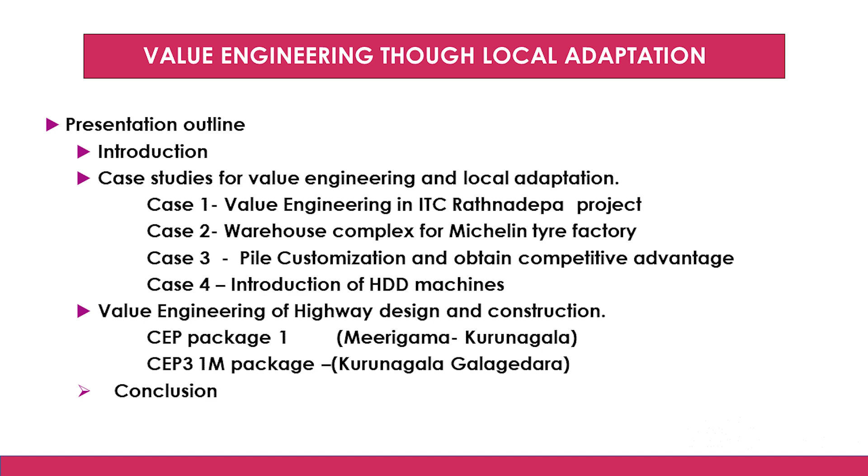The process of cost saving and efficient performance while improving functionality and quality is considered as value engineering of a construction project. Value engineering is largely a discussion point in the Sri Lankan context as well as globally. Because now the resources are depleting very fast, we need to preserve the resources for the future generation. So therefore, value engineering as well as green concepts come into consideration.

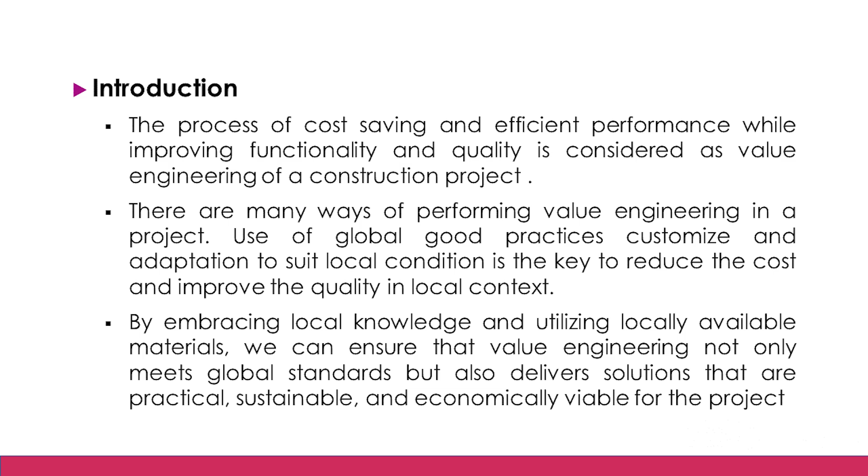There are many ways of performing value engineering in a project. Use of global good practices, customizing and adaptation to suit local conditions is the key to reduce the cost and improve the quality in the local context. In the case studies, I would like to discuss more in this aspect. By embracing local knowledge and utilizing locally available materials, we can ensure that value engineering not only meets the global standard, but also delivers solutions that are practical, sustainable, and economically viable for the project. With that note, I would like to go to the case studies.

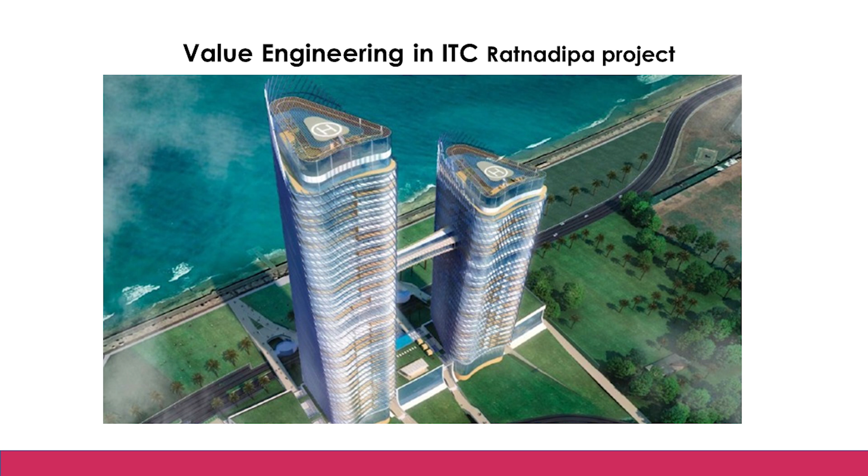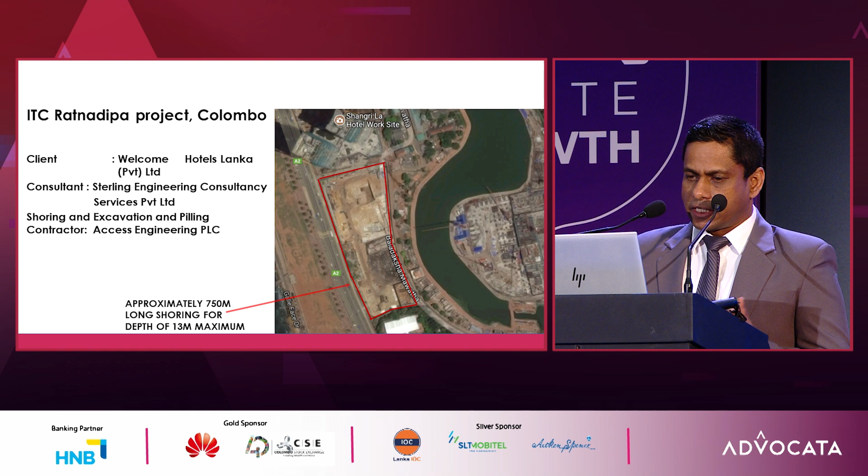The first case study I would like to discuss is the ITC Ratnadipa project. I would like to give some overview of this project. The client is Welcome Hotels Lanka Private Limited and the consultant is Sterling Engineering Consultancy Services Private Limited in India. The shoring, excavation and piling contractor is Access Engineering PLC. If you see this site location, this is in year 2014. In front of this site is the Galle Face Green and Galle Face Road, the left-hand side is the Shangri-La Hotel, and the right-hand side is the Galadari Hotel.

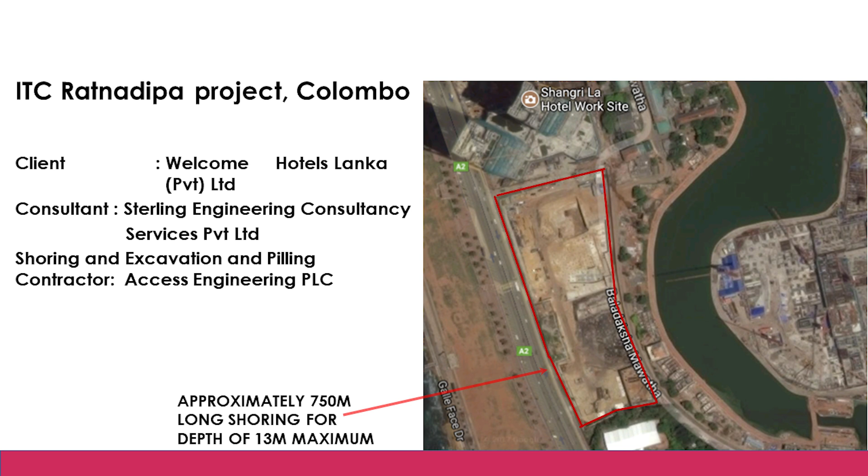Of course, we observed that at the rear side there was the KVA line underground in this area. This is very sophisticated; we need to do construction without disturbing the surroundings. The excavation depth here is around 13 meters. It's like a 4-story basement excavation with approximately 750 meter perimeter. Compared to what we had done previously, this is a big project.

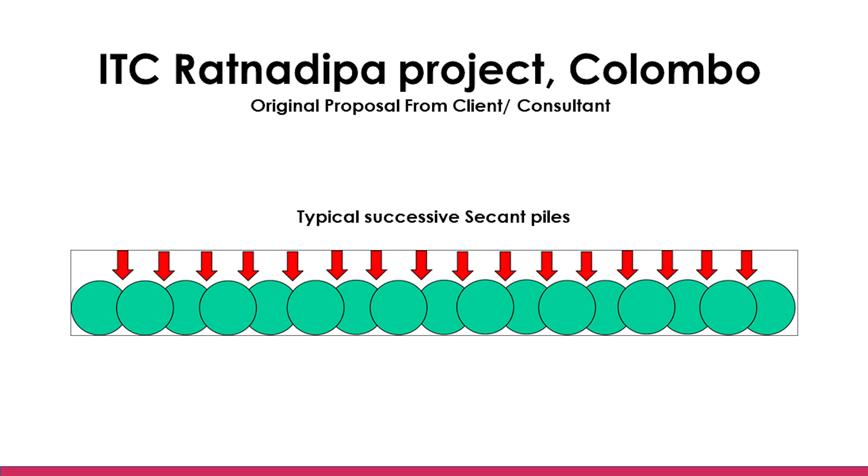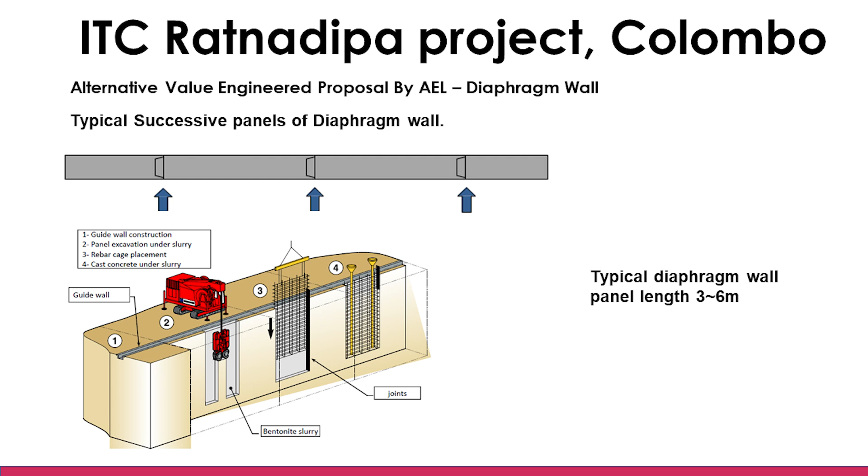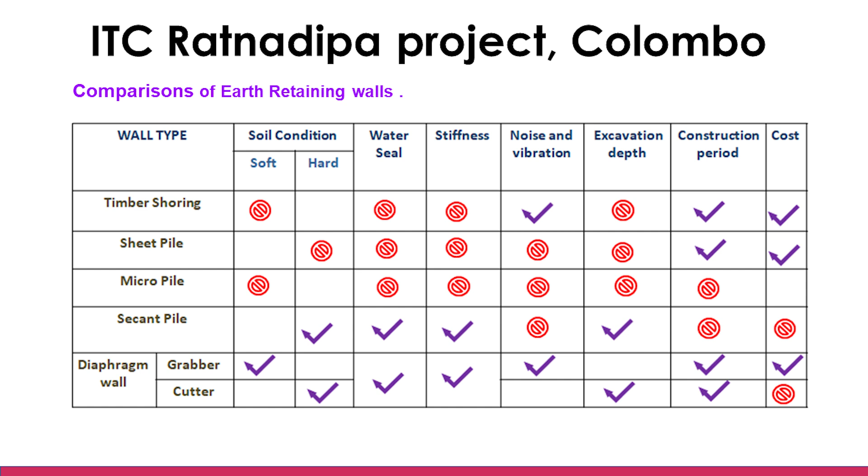The consultant and client's proposal was to have a typical secant pile construction. In this construction, there are a lot of drawbacks. We found that there is vibration in this concept, and also material wastage and all these things. So then we checked what are the globally available concepts in this situation, and we found that there is something called a diaphragm wall. We compared the pros and cons of the two systems, secant pile against the diaphragm wall system. We found that the noise and vibration is much less in the diaphragm wall, the construction time is also much less, and the cost is also much less.

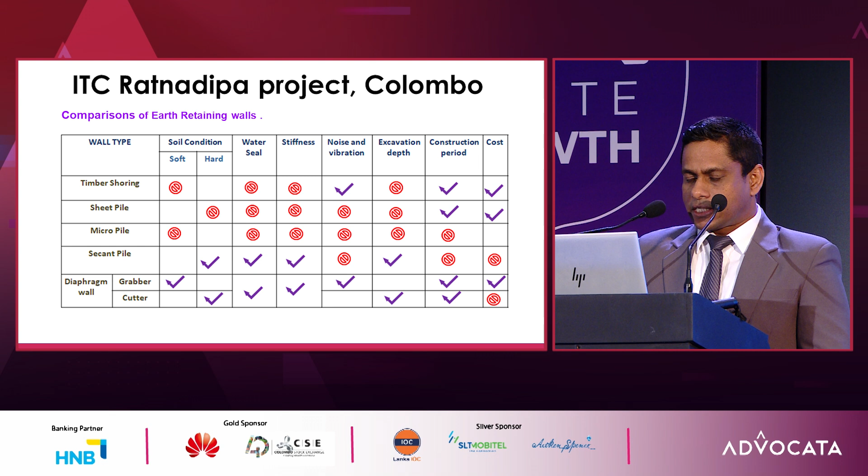So then we discussed with the client and consultant these positive aspects, and whether we can use this diaphragm wall concept for this situation. The consultant and client happily accepted our proposal and asked us to give them more detailed analysis, designs and how we are performing this. With all the details, they accepted our proposal, and we carried out the diaphragm wall construction on the site with much less cost, without harming the environment and with good quality. So I would like to go to a small video presentation to see how we have done this in practice. Please enjoy the video presentation.

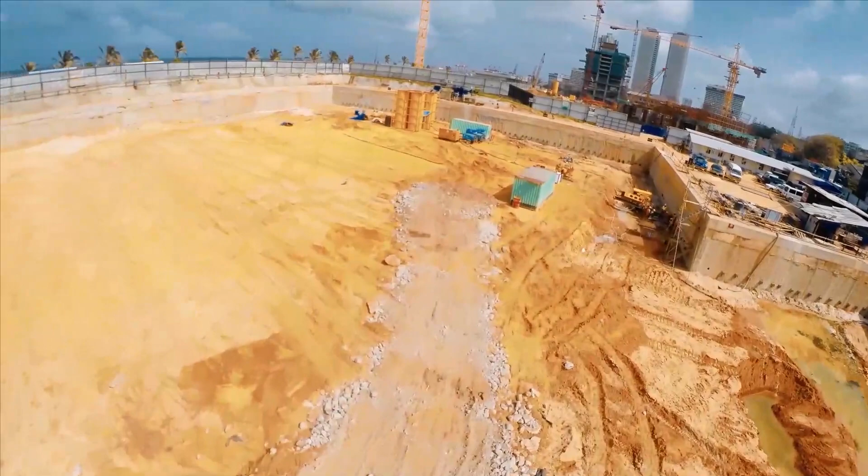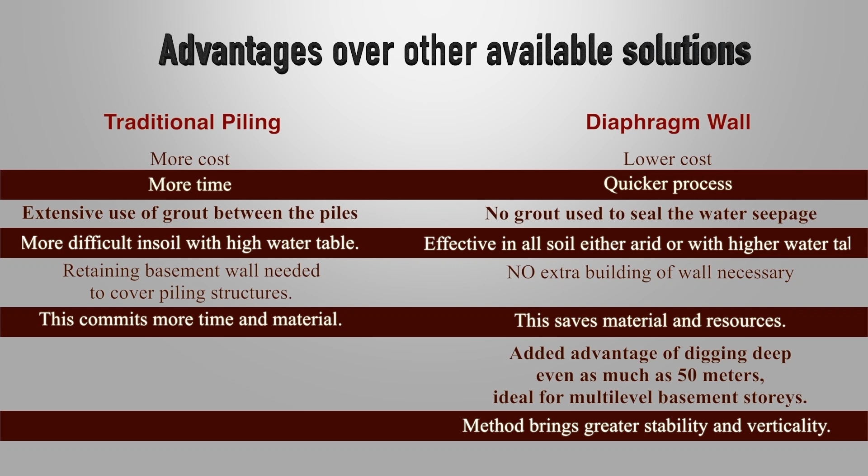Access Engineering has introduced the concept and execution of the diaphragm wall in the preliminary stages of preparation of subterranean structures at foundation levels in mega high-rise building projects. This internationally advocated, exciting new development has been adopted and successfully implemented in Sri Lanka just recently. The notable advantages over other available solutions can be seen. Lower cost, quicker process, no grout used to seal the water seepage, effective in all soil, either arid or with higher water table. No extra building of wall necessary. This saves material and resources. Added advantage of digging deep even as much as 50 meters. Ideal for multi-level basement stories. Method brings greater stability and verticality. This then is the future for building basements.

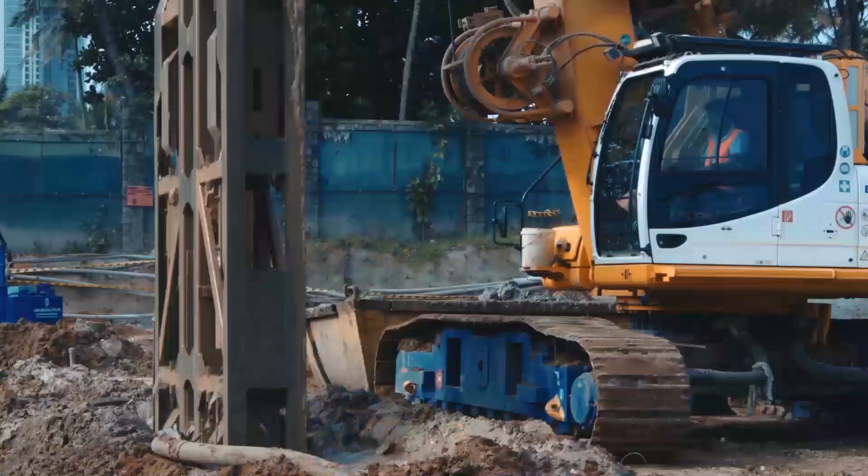The Bauer GB34 proceeds with amazing accuracy. Vertical trench walls are possible because of this. The magnificent Bauer GB34 is key to the success of the diaphragm wall. The very nature of the grabber bucket and its reach ensures the ability to dig vertically and maintain accuracy.

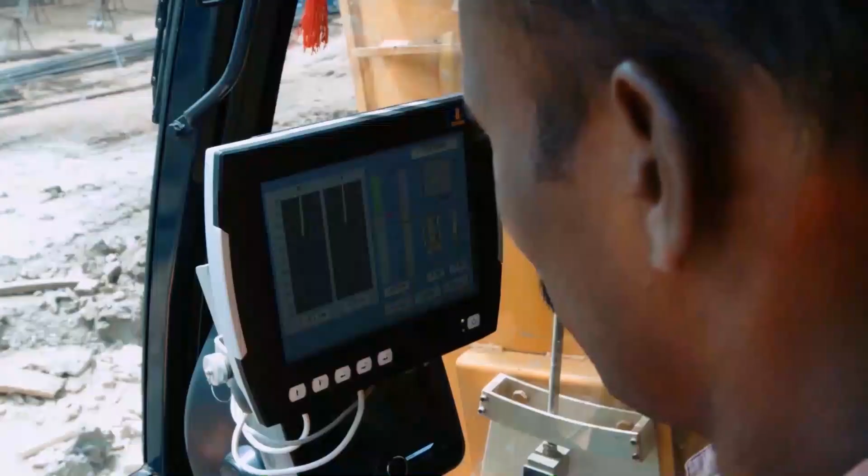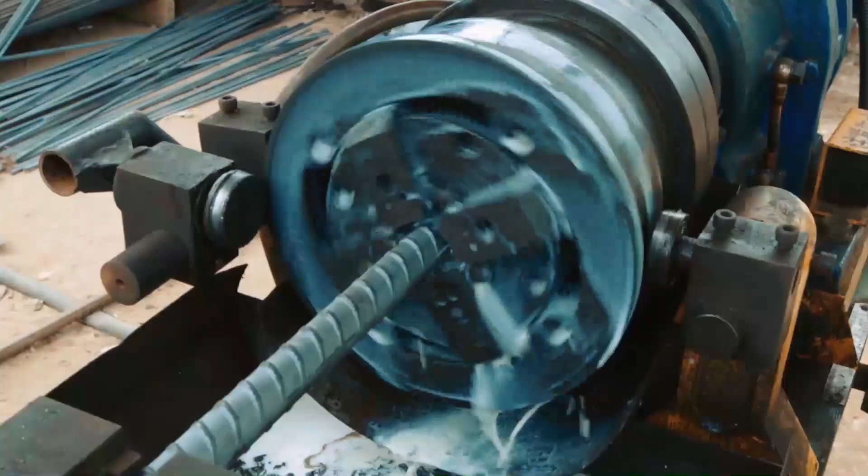Onboard computers maintain the tension so that lateral oscillation of the grabber is minimal, and this adds to the effectiveness in maintaining verticality. Notably, the rebar cage is prefabricated on site. Instead of spot welding or tying, the use of a coupler enhances workability while also saving on cost.

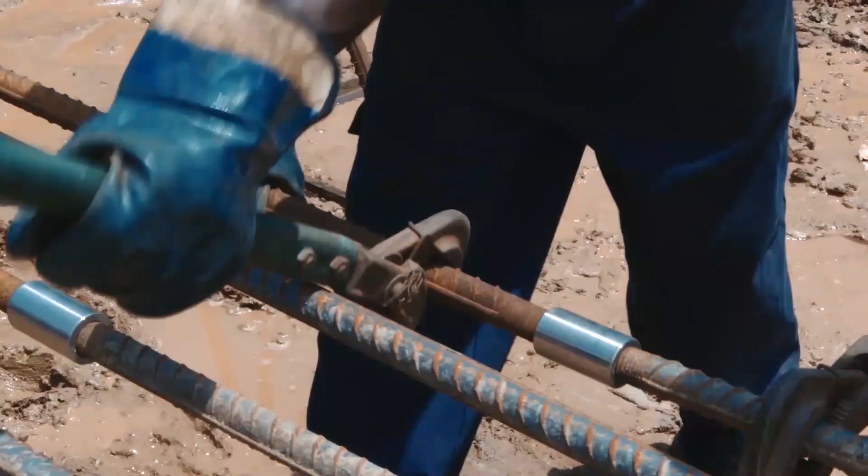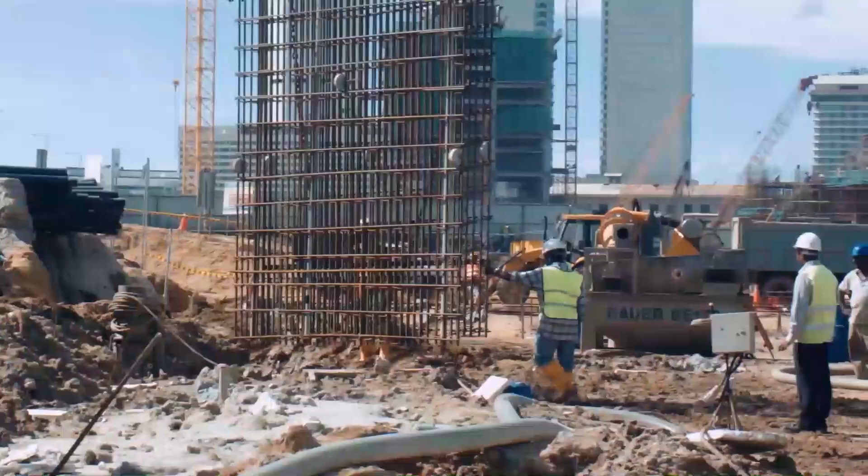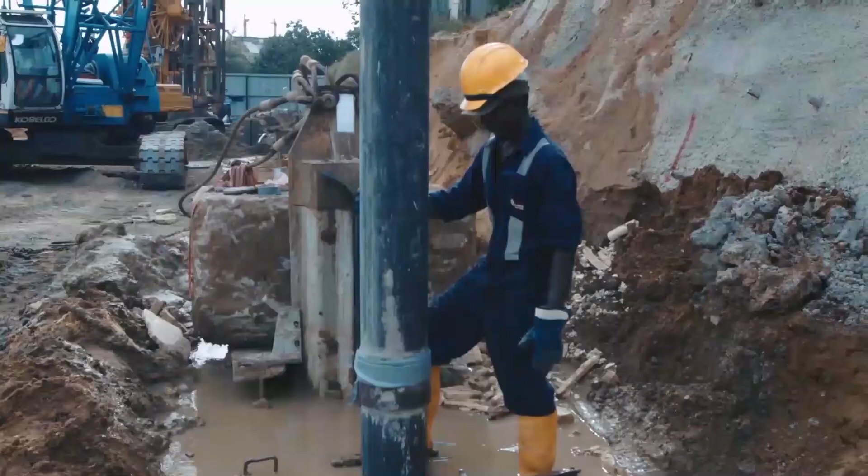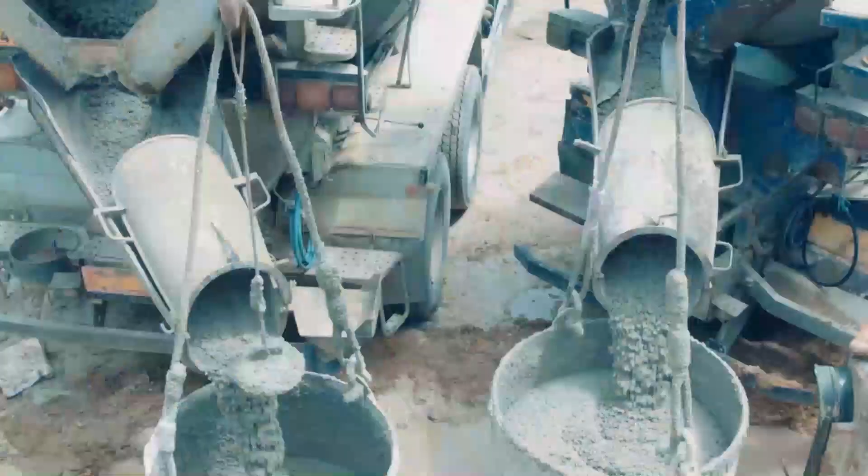In the dug trench segment, the rebar cage is lowered in position. Large-scale cages can be lowered using this approach. The speed at which all this multiple activity can be done is notable. Pre-mixed concrete is applied. Using the double tremie, self-compacted concrete is introduced. Soil anchoring is the final element.

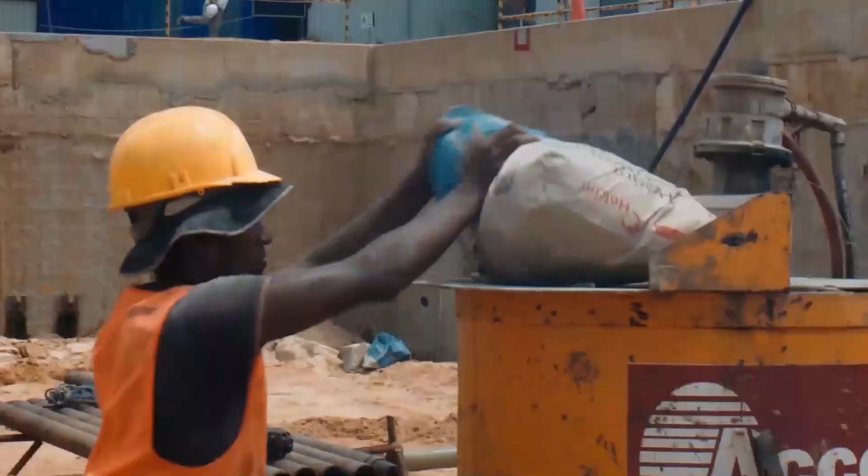The Klemm machine is outstanding in its flexibility, even in confined space. This technologically advanced device drills through the perimeter and anchors a diaphragm wall with the surrounding subterranean soil. In this technique, soil is reinforced with slender elements such as reinforcing bars, which are called nails.

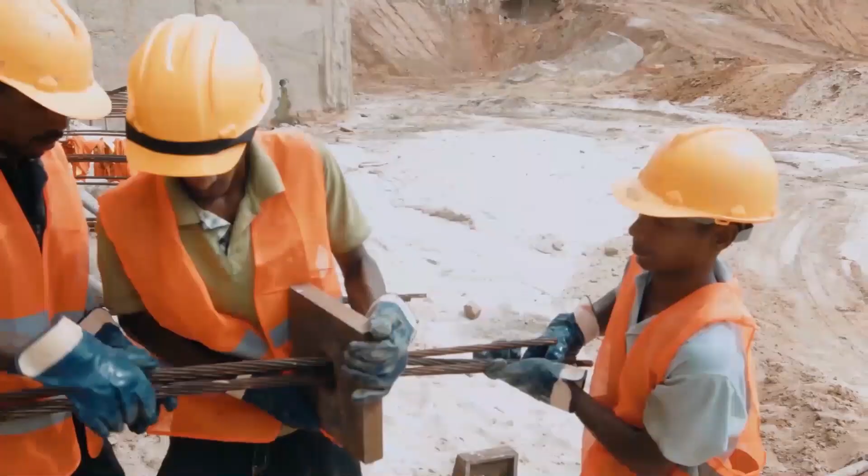These reinforcing bars are installed into rows of holes that are bored into the soil, and usually cement grout is injected under high pressure. Wedge plates provide added stability and secure the nail ends or wire rods reinforced with the cement grouting. Thank you, Patient, for that presentation.

This is the diaphragm wall system we introduced for the first time to Sri Lanka by Access Engineering. So next, this is a good example of the customization of piling and obtaining competitive advantage. This is a good example of the value engineering concept, what we have done.

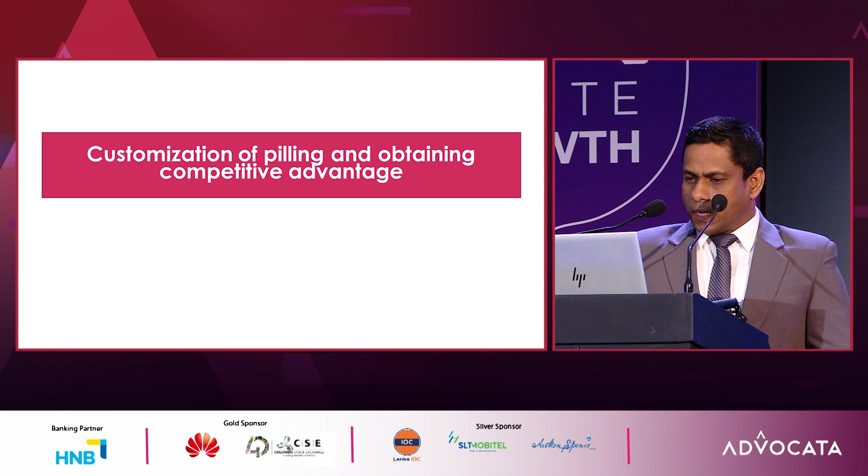Generally, the commercially available pile diameters in the market are diameter 800. This is a bit technical, but I will explain in simple language. The diameters are 800 millimeter, 1000, 1200, 1500. We checked the cross-sectional area of these pile diameters. You can see from 1000 to 1200 diameter, the cross-sectional area increment is 40%. But 1200 to 1500 diameter cross-sectional area is around 60%.

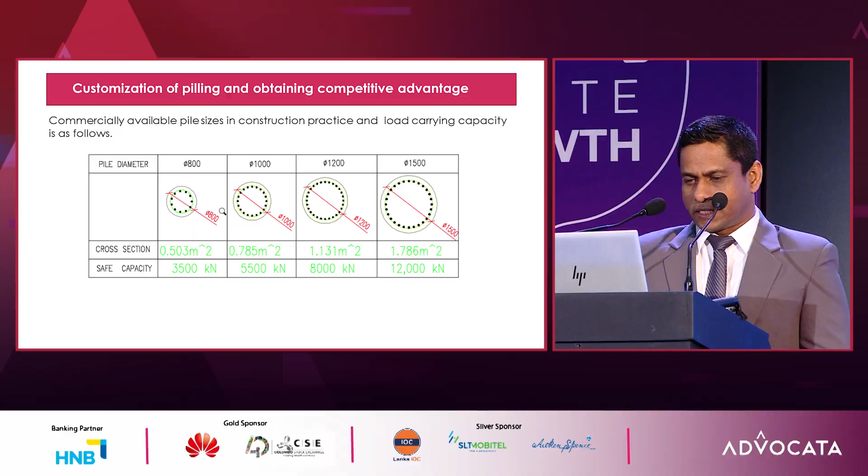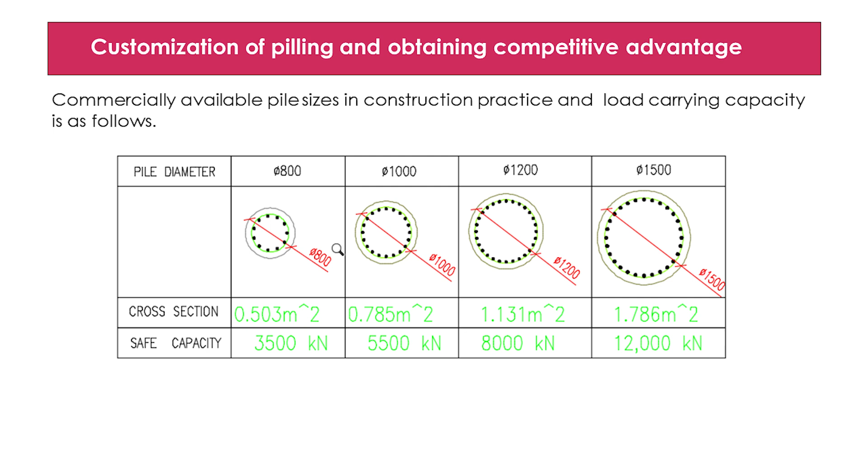So we need to pay for the cross-sectional area increment. You can see the load carrying capacity of the 1200 pile is 8,000 kilonewtons, the unit of the load carrying capacity, and the 1500 pile is 12,000. If we have a load of say 8,500, we need to use the 1500 diameter pile, but it is underutilization of the 1500 pile, and we need to pay 60% more than the 1200 pile.

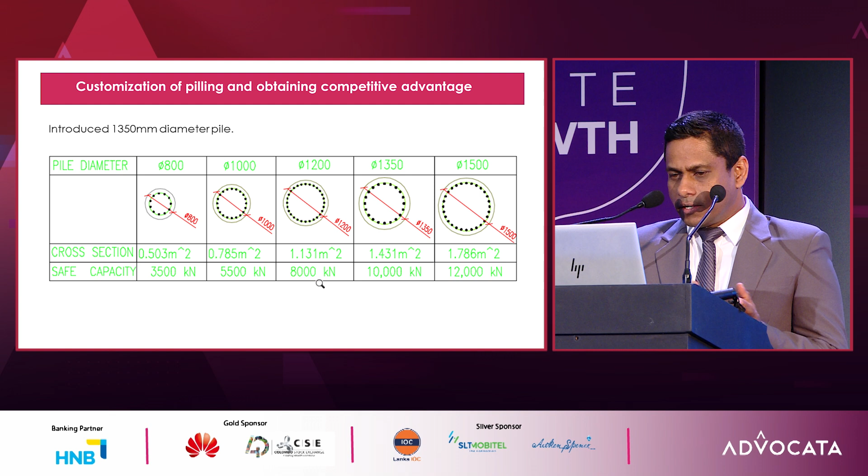So what we did is we introduced a 1350 diameter pile. It's around 30% area increment of the 1200 pile. Load carrying capacity is 10,000. So then for 8,500, 9,000, 9,500, 10,000, in that range of load, we could use the 1350 pile. And then we checked the cost difference between the 1350 and 1500 pile for an around 20 meter long pile. We found that around 400,000 Sri Lankan rupees can be saved by doing this kind of modification.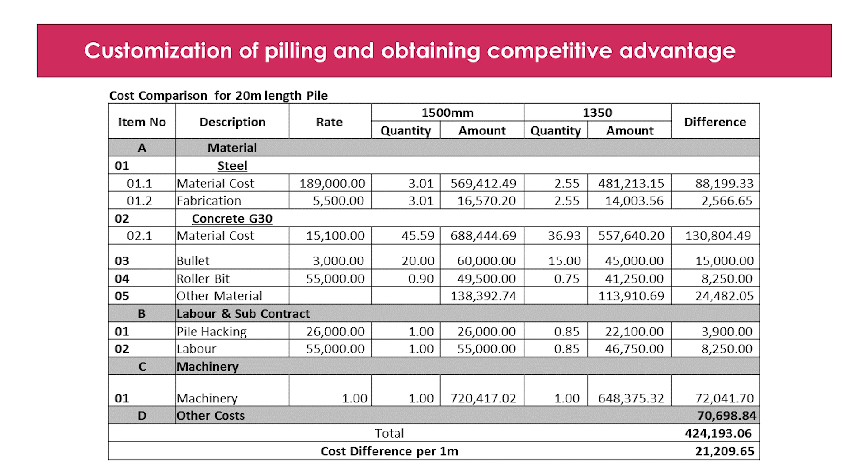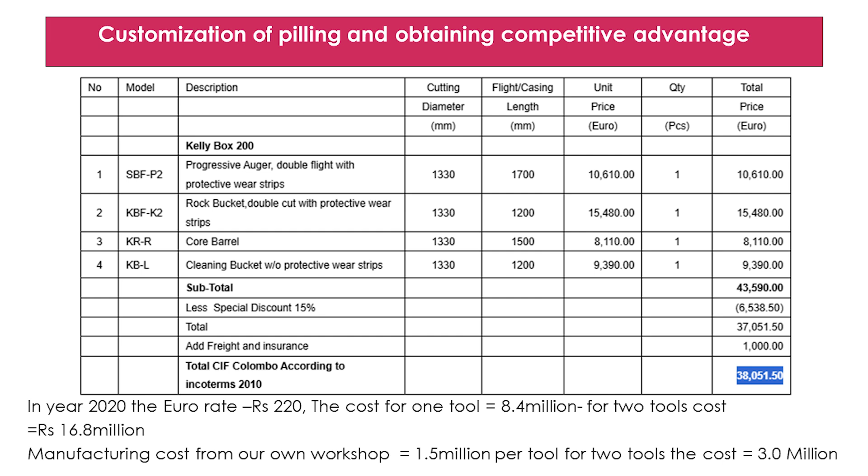But the thing is, we didn't have the tool to do the 1350 pile. We imported this piling machine from Bauer, Germany. So we inquired whether they can do the 1350 pile diameter tool, but they gave us a 1330 diameter pile in year 2020 at the cost of 8.4 million Sri Lankan rupees, which is 38,000 euros. In year 2020, we had issues with COVID as well as the financial downturn. We had the forex issue in the country.

So therefore, we checked whether it is possible to do this tool in-house, in our Access workshop. And we found with our mechanical engineers that we can manufacture it in our workshop at the cost of 1.5 million. At least we need 2 tools to do the piling for the larger project. So instead of 16.8 million, we manufactured the tools at the cost of 3 million. So we saved on the tool manufacturing as well as cost saving and material saving.

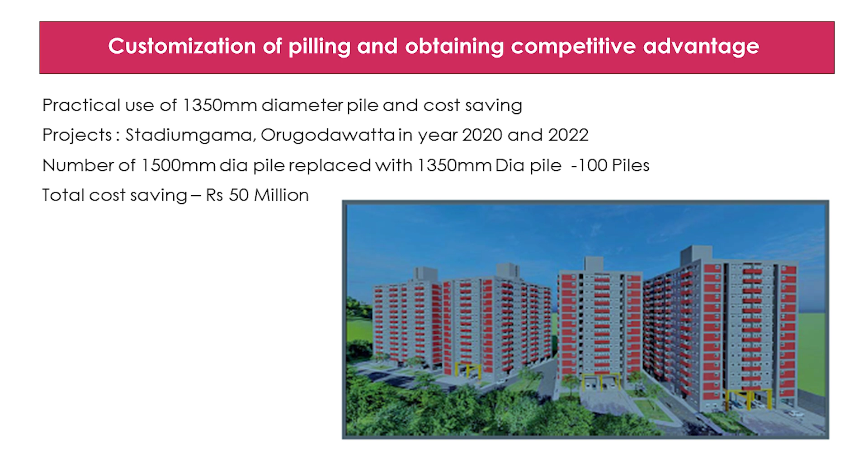And we employed this 1350 pile for two projects of Access, and we saved 50 million only from this value engineering concept. This is a good example of what we have done with value engineering.

Next, I would like to discuss the horizontal directional drilling machine, introduced for the first time to Sri Lanka. You know that in Sri Lanka, all the roads are asphalted and finished. Then all the service providers come into the picture and dig everywhere on the road. Again, we need to do everything on the road surface. So we checked whether there is any possibility to do the underground ducting without open excavation.

So in year 2008, we secured the project from Dialog Network Private Limited to lay the fiber optic cable from Matara to Wadduwa.

So we introduced this concept, the horizontal directional drilling machine, without open excavation of the road crossing. We introduced this concept and we performed that. In this previous project we did it with 100 and 150 millimeter diameter pipes, but subsequently we observed that this can be done for bigger pipes, 500 and 1000 millimeter diameter pipes.

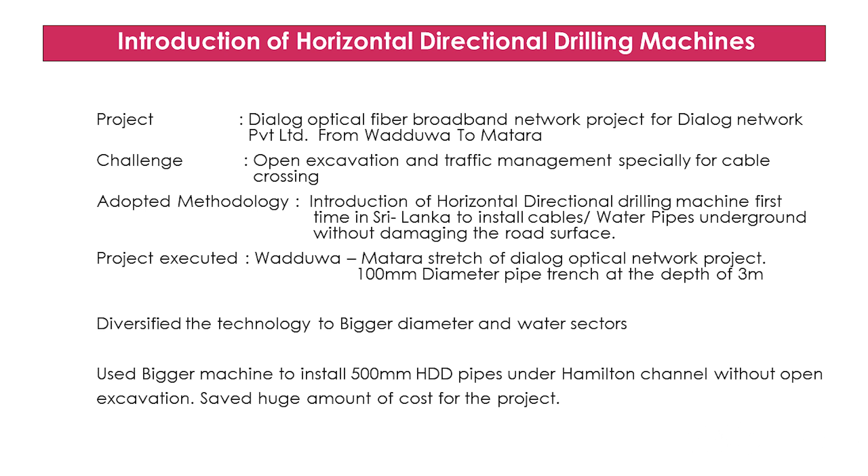So we introduced this concept to another project, the Hamilton Canal Crossing project for the Sobadhanavi power plant project, to take the water from the sea across the Hamilton Canal. So we introduced this concept and we saved a lot of money and saved the environment, avoiding the environmental issues, and at very low cost we performed this construction.

So there is another video here. I think it's better to play this video through there, and I will escape from here for you to play that other video. Please enjoy a small video.

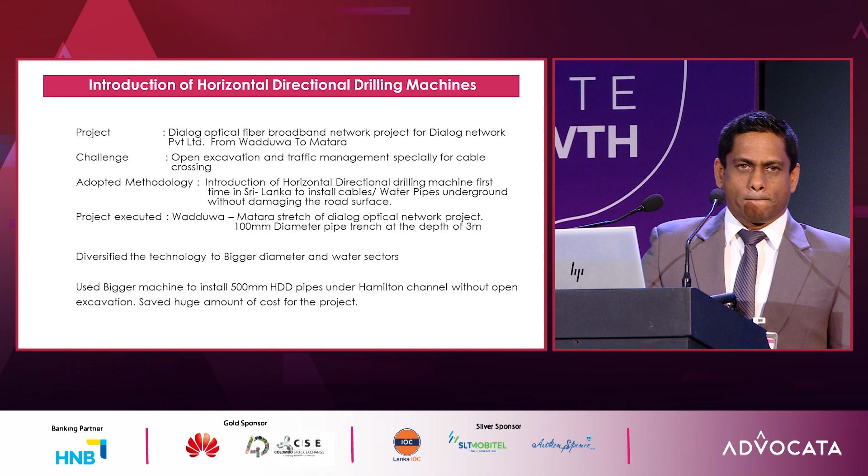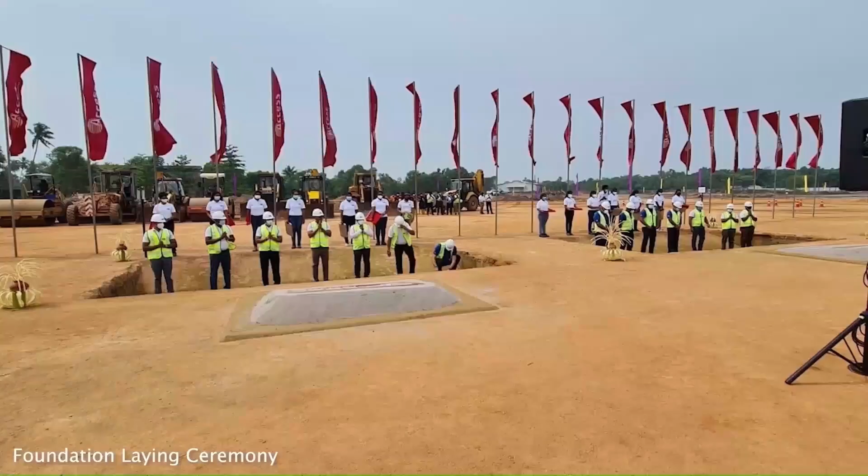Furthering our investments in the logistics sector, Access Engineering invested in the design and construction of EGF2, a world-class distribution facility built to the exacting standards of Michelin International, the world's largest tyre manufacturer. Next one. This facility, which is situated on 30...

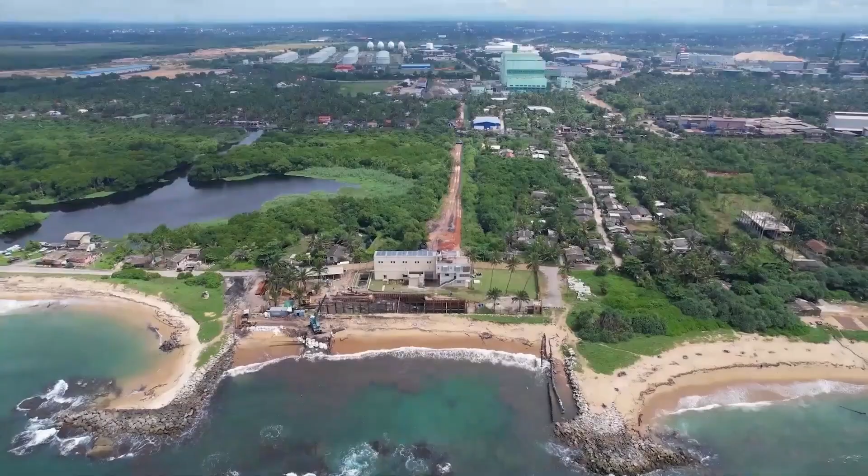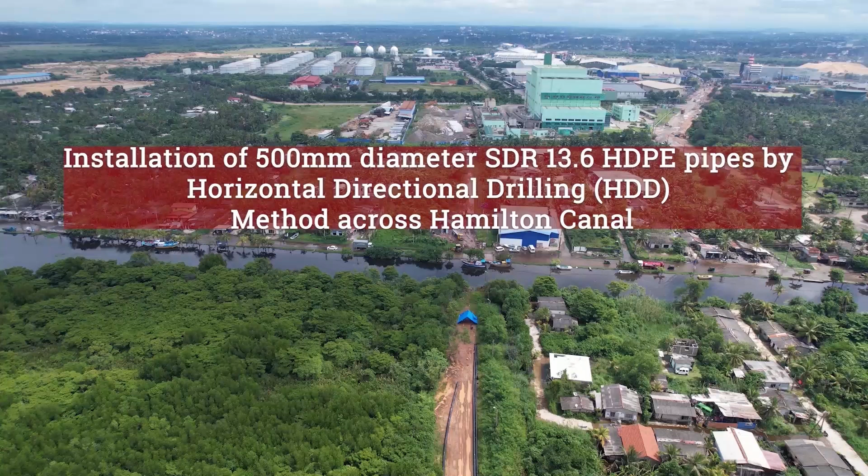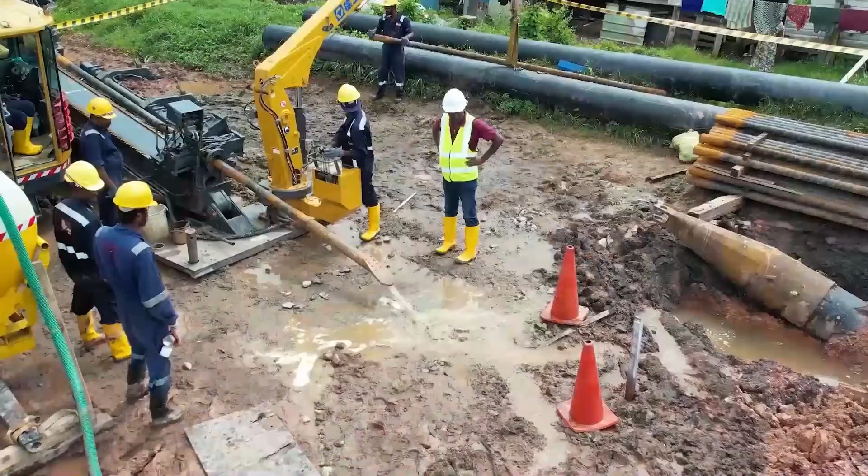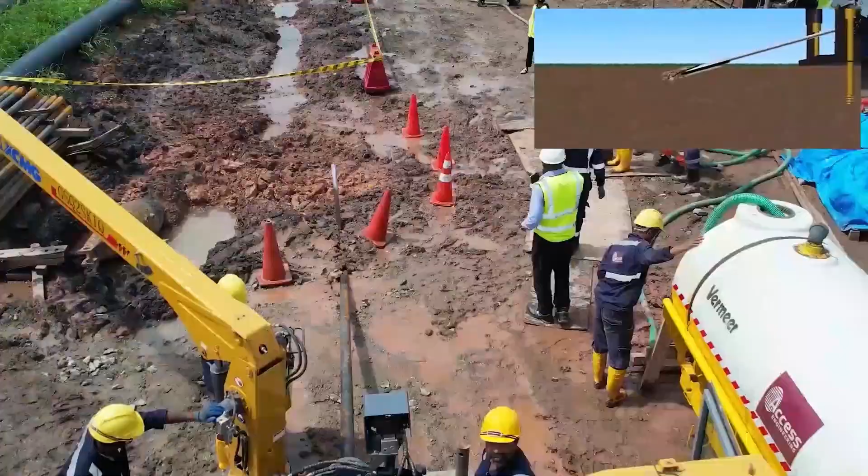Throughout the developmental phase of the Sobadhanavi power plant, the greatest challenge was to develop a seawater intake mechanism for the turbine cooling system, necessitating the crossing of the Hamilton Canal in the Elakanda area. Accepting this challenge, Access Engineering PLC introduced the horizontal directional drilling, HDD method, a value engineering technique pioneered by Access in Sri Lanka. This solution aimed to traverse the Hamilton Canal beneath its bed without disrupting or causing harm to the prevailing environmental conditions or the local community.

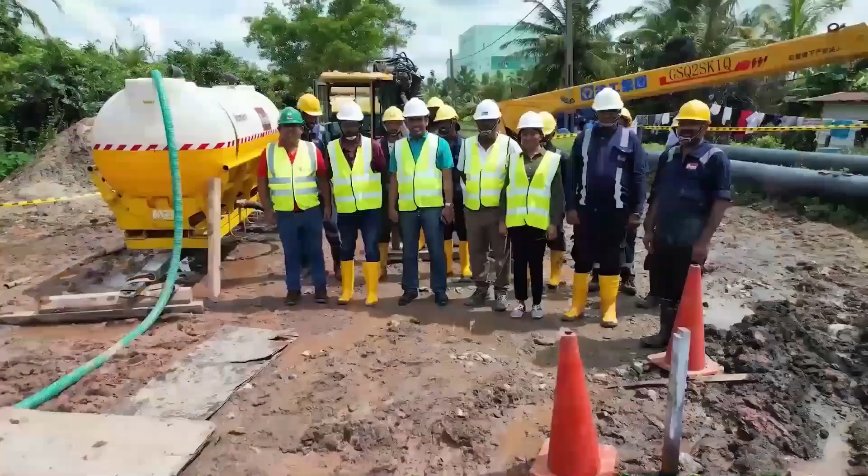Thank you for your patience for that video. And this project was completed in 2022. So now I would like to go to my main topic, value engineering through local adaptation of expressway projects.

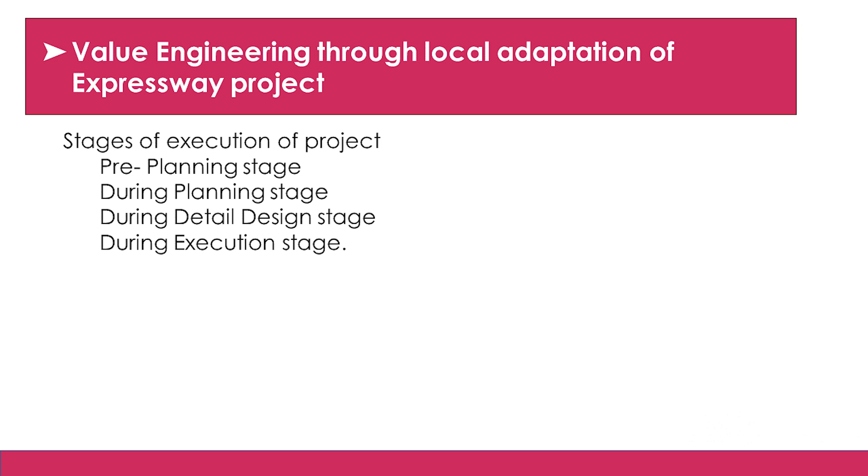Not only the expressway project, any project has 4 phases: the pre-planning stage, the planning stage, the detailed design stage and the execution stage. Under each of these stages, we can do value engineering and reduce the cost of the project. The pre-planning stage is, in the Sri Lankan context, the client and client's engineer's responsibility, but I would like to give some overview of what we can do.

First, whether it is necessary to do the highway. We have seen in some highways in the Sri Lankan context very few vehicles passing through those stretches. If we can improve other road networks related to these stretches, we could avoid this kind of highway. But Kadawatha to Nittambuwa, Kadawatha to Mirigama, we definitely need the highway, but it is still not happening.

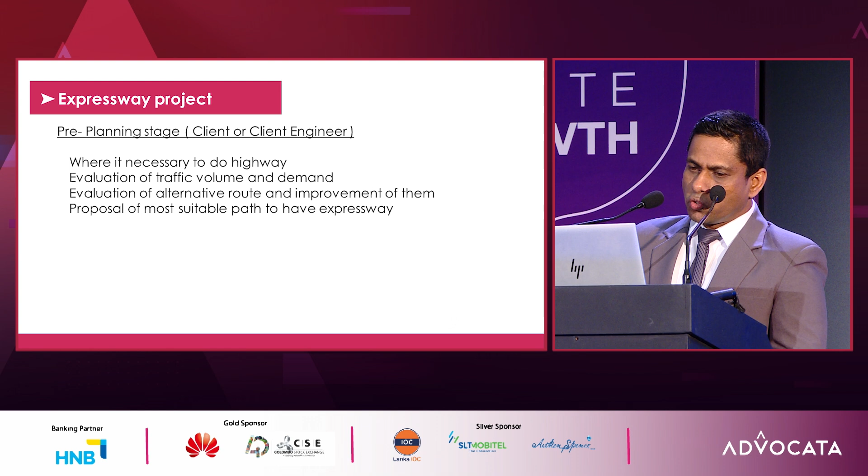So therefore, evaluation of the traffic volume and demand, and a decision whether it's necessary to do the highway. The third one is the evaluation of alternative routes and their improvement, whether we can avoid the highway requirement. And the fourth one is the proposed most suitable path for the expressway. There can be several alignments, but we need to select the most suitable alignment. So that is the pre-planning stage.

The planning stage is also the client and client's engineer's responsibility. The first one is accurate assessment of the design inputs, because we take the design inputs from the existing condition, but we need to accurately assess them. And we need to select a simplified alignment and geometry. Third is to reduce unnecessary structures, selecting the road alignment in such a way that it reduces them.

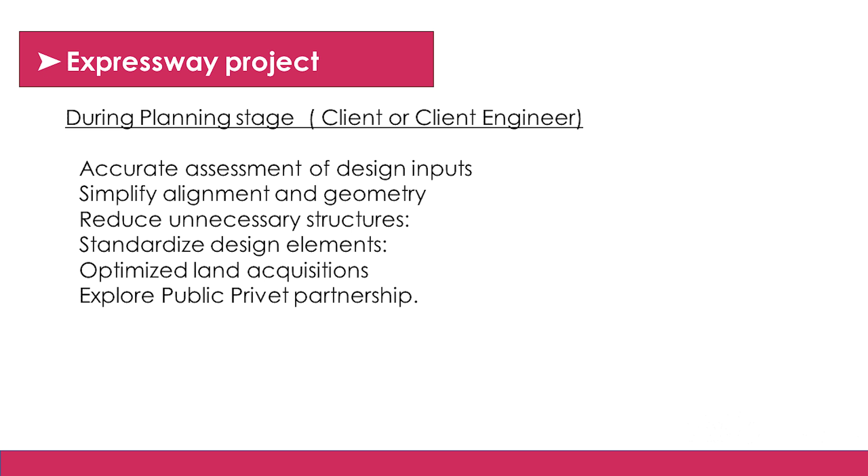The fourth one is standardized design elements, so we can use pre-stressed elements, culverts and such to reduce the cost. And optimize land acquisition and explore public-private partnership. The last 2 items are very important because land acquisition is the most important part of a highway project, as it involves a very big cost.

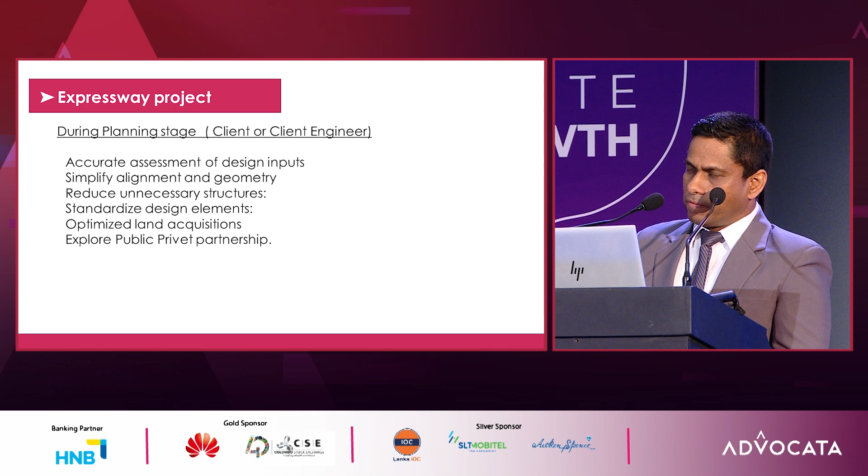And exploring public-private partnership is also important because the private sector always thinks about the return on investment. So it's very important to consider these last 2 items when carrying out the expressway. The third one is the detailed design stage. This is actually the contractor's responsibility. Generally, it comes to us as a contractor.

There are a few ways of reducing the cost during the detailed design stage. Design concept change and use of precast, pre-stressed, prefabricated elements, use of geosynthetic materials, preloading and other methodologies are there to reduce the cost through ground improvement, and use of customized element sizes such as pile diameters and beam sections to minimize the cost. As I explained with pile diameter optimization and customization, we can reduce the cost.

The other one is design for durability. We can do durable designs with very sustainable materials, and we can reduce the cost from that as well. For the execution stage, I will give some pictures to give some understanding of how we have done the optimization and how we have reduced the cost in our Central Expressway project.

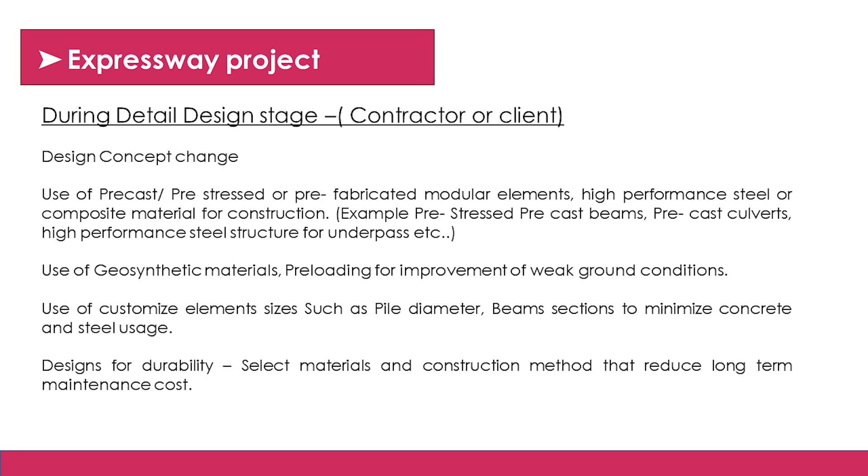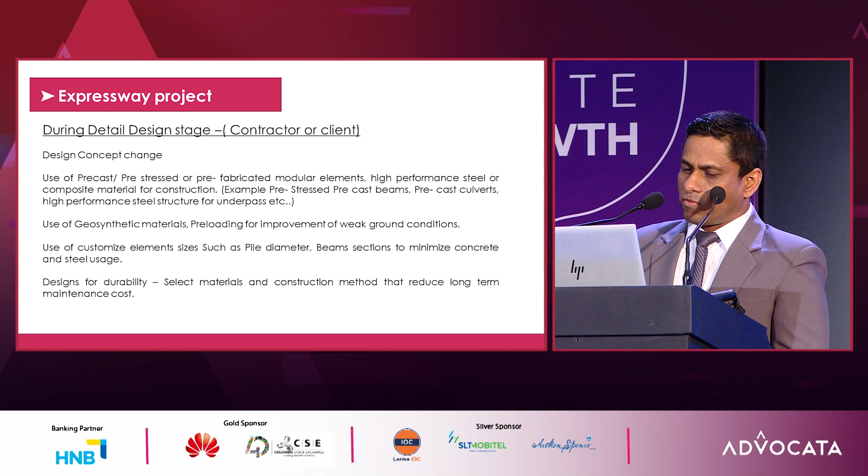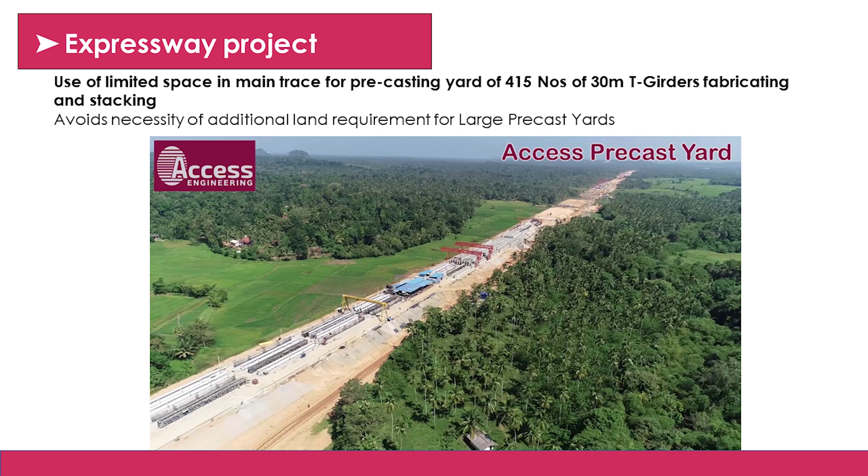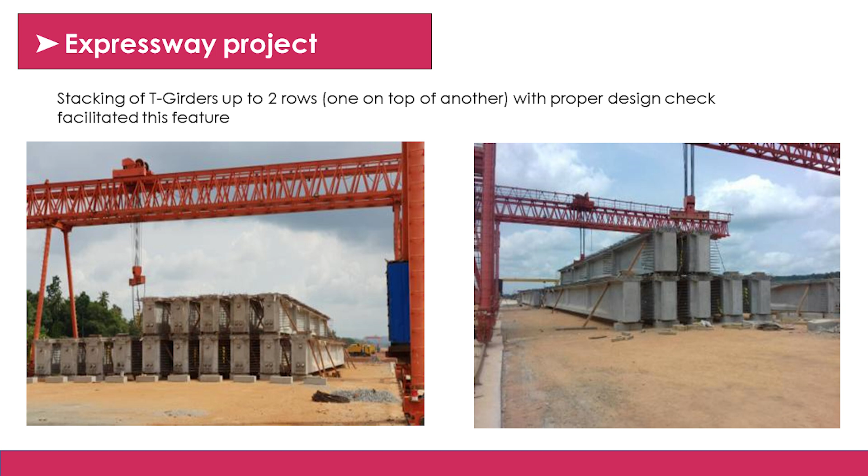So we used the highway. I mean, we didn't use extra, additional spaces. The highway we built itself was used to fabricate these precast beams, and we stacked the beams on top of each other to minimize the land usage. You can see some pictures of what we have done to limit the land usage.

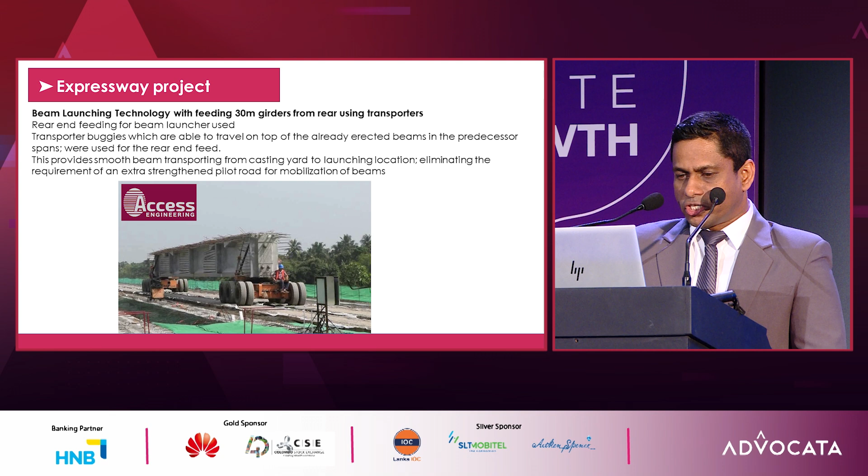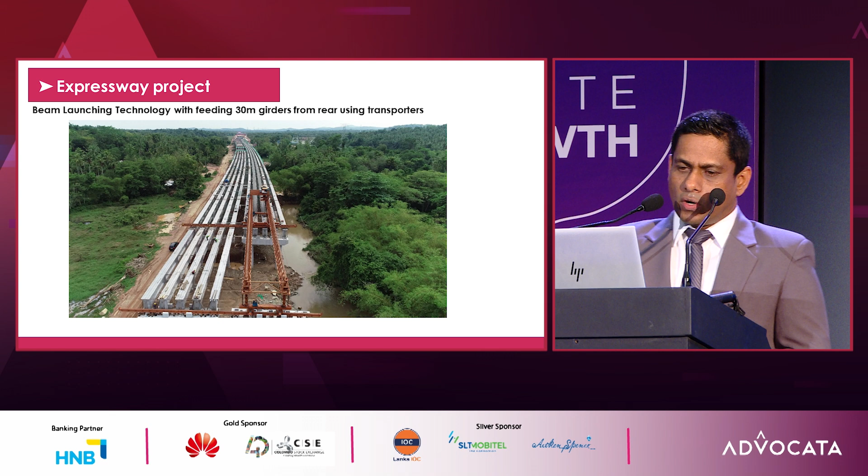On the other hand, we manufactured beam transportation machines in order to minimize crane usage, because if we cast the beams outside of the stretch, then we need to use a bigger crane to lift and place the beams. But in this condition, we manufactured these transporter machines, and we were able to reduce the handling cost, and the risk of toppling and damaging the beam is also much less with this methodology.

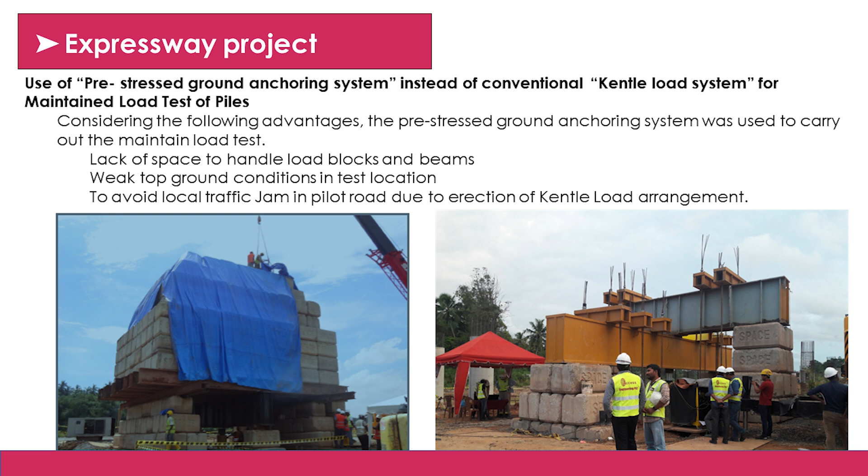You can see the beam launching mechanism. As well, the conventional method of pile testing is putting the load on top of the piles, but we introduced ground anchors, and without using much machinery, we have done the pile testing this way. I'll show another video presentation to give you some understanding of how we have done it in the Central Expressway project.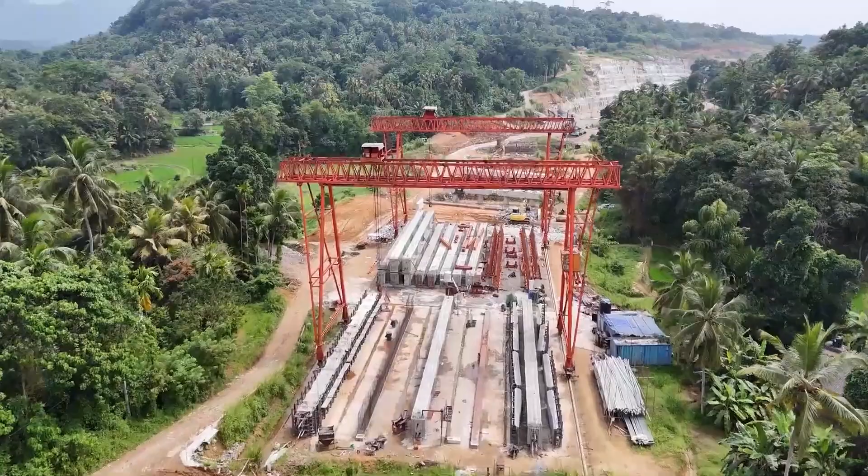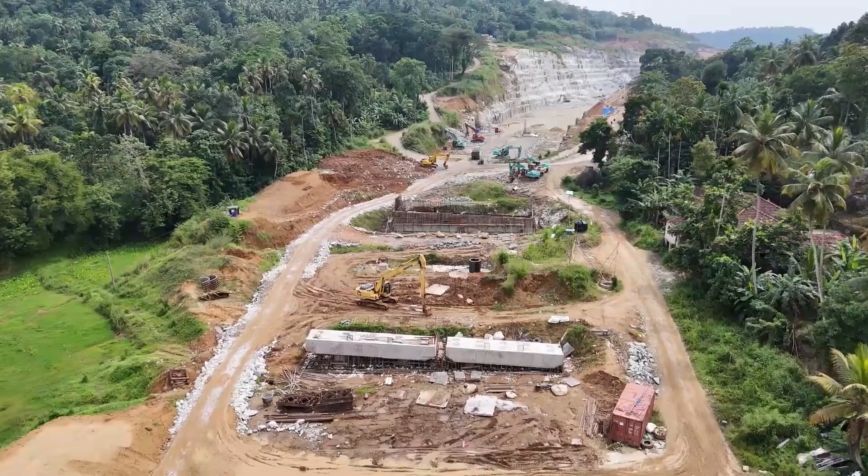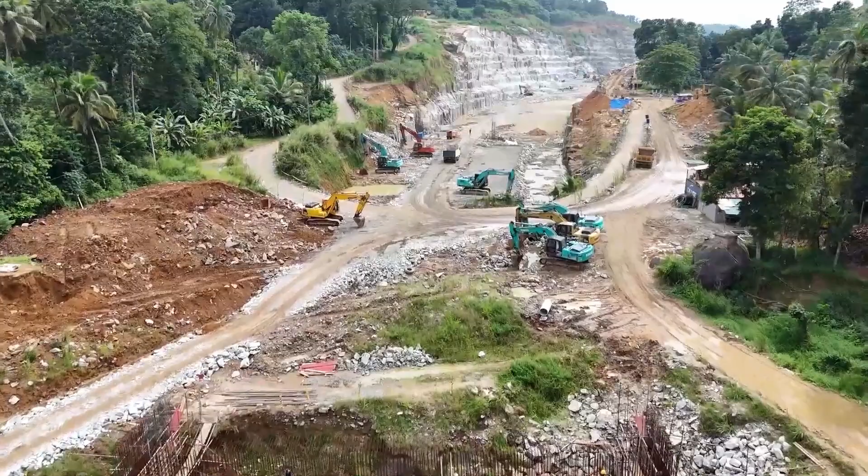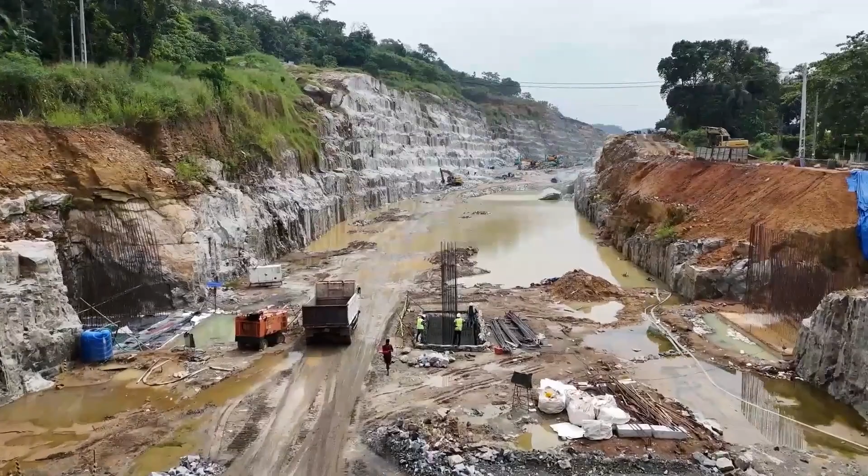This is the same stretch we used to cast the beams without using additional extra spaces. You can see big rock excavation in this area. If in the initial design the data had been checked properly, we could have reduced this kind of rock excavation. This is around 45-meter rock excavation.

This stretch is called the CP3 package, the Kurunegala to Galagedara stretch. This is an ongoing project. This stretch is going on.

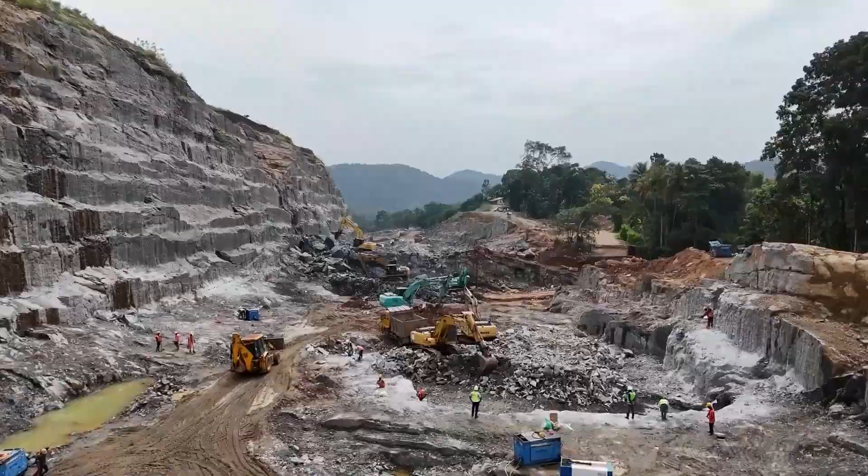I think my time is over, so I would like to go to the conclusion part. So can you stop this, and yeah, I would like to conclude my presentation this way.

Value engineering is a critical aspect in today's context, considering resource scarcity and the growing emphasis on sustainability. Exploring and adopting the latest global best practices while customizing them to local conditions can significantly reduce the cost, save time, improve efficiency, and enhance the quality and constructability of a project. The use of modular construction and standardization tailored to local conditions is an effective way to reduce the cost and expedite project completion.

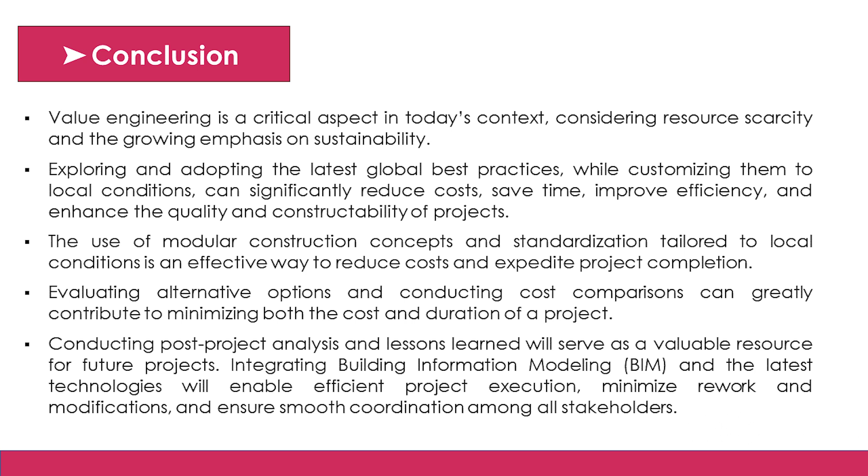Evaluating alternative options and conducting cost comparisons can greatly contribute to minimizing both the cost and the duration of the project. Conducting post-project analysis is the most important part. Post-project analysis and lessons learned will serve as valuable resources for future projects. Integrating building information modeling and the latest technology will enable efficient project execution, minimize rework and modification, and ensure smooth coordination among all stakeholders.